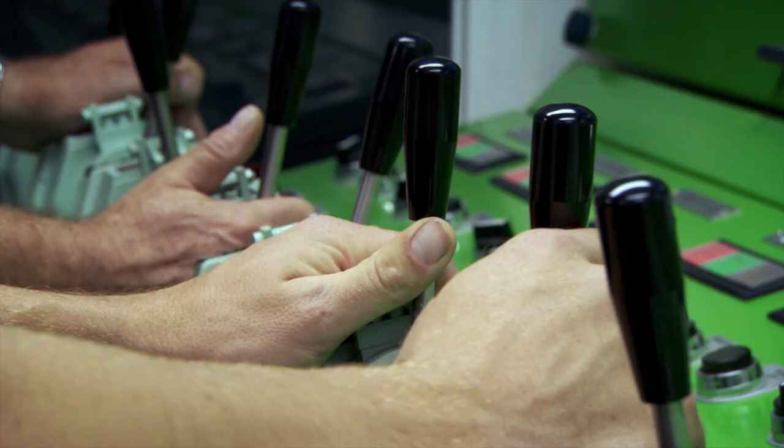These tugs are towing a contradiction. A tunnel segment that's both colossal and fragile. Come back, close. Slow down. A raft of techno breakthroughs and untested results. Bound for a place few know, to entice the world to visit. And even sway the choice for the Olympic Games.

Busan is South Korea's second largest city. 4.2 million people. Bigger than Madrid, closing in on Milan, and as hectic as Manhattan. South Korea is an Asian tiger, and Busan makes it roar. Its skyline will soon include one of the world's tallest buildings. It's the nation's biggest port, and the 5th busiest in the world.

Every 3 seconds, they unload a container. It's so busy, they had to build the sprawling Busan New Port. And still, Busan grows. Busan is such a comer, it's bidding for the 2020 Summer Olympics. But Busan has one big problem, and it's on display here at one of Asia's biggest fish markets. Dozens of vendors cram in here, 14 hours a day, every day of the year. And that's the trouble with Busan. It's so crowded, it's running out of room.

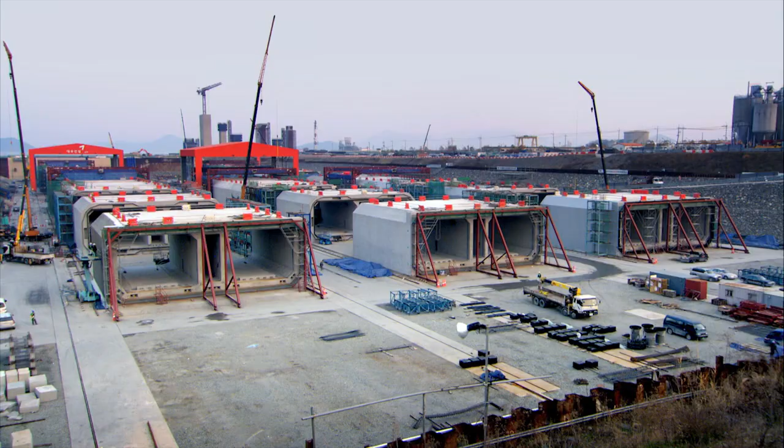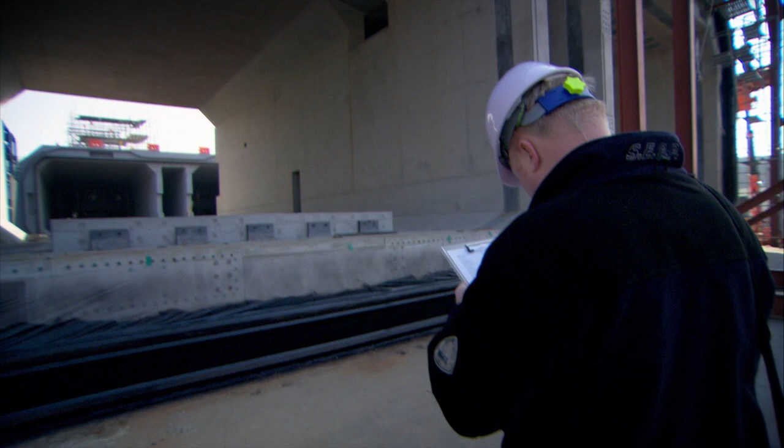Plunging 48 meters below sea level, the link will boast the deepest immersed roadway in the world. The tunnel will be composed of 18 mammoth segments, each as long as 2 football pitches and as heavy as an aircraft carrier. Wide enough to carry 2 lanes of traffic each way, with an access tunnel between. That's the concrete reality. Now, here's where it gets dicey. Each segment has to be carefully towed into position, then carefully sunk to the seabed. And all the segments have to align within 35 millimeters, less than a thumb's width.

Weather adds its own demands. This site is exposed to the open sea. There are always high waves, and the water is deep as well. It is wide open to the Northwest Pacific Ocean, so we have extreme exposure conditions for the construction period. So we've got to be ready for whatever that sends us, like big swell waves, strong winds, and even the occasional typhoon.

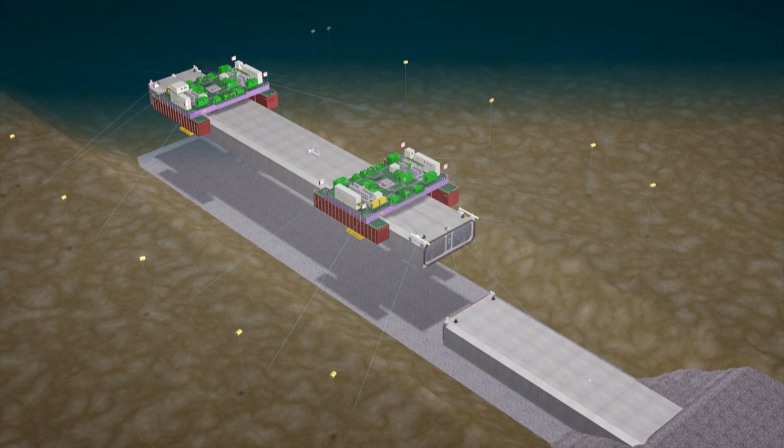Building a tunnel like none ever seen will take techniques like none ever tried. Yet the Koreans have never built an immersed tunnel. But this country has. The Dutch have 5 centuries of experience at holding back the sea. Tunnel immersion is actually a Dutch speciality. If you look at the number of immersed tunnels in the world, most of them are in the Netherlands.

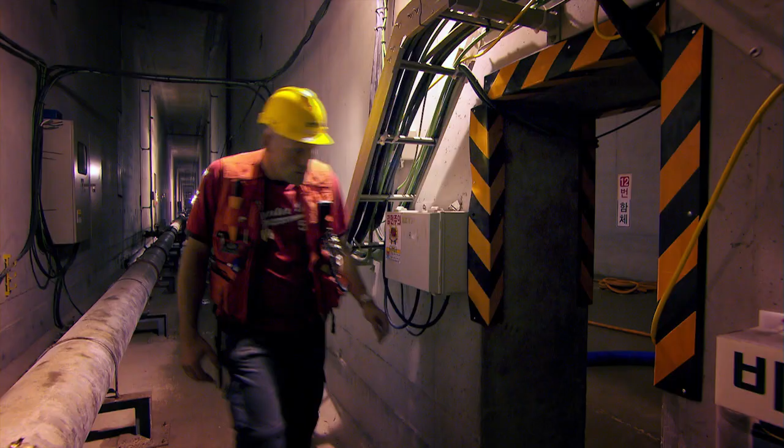21 years ago, Peter van Westendorp joined Strukton at the bottom and worked his way up. He's worked on 8 underwater tunnels. Better when it's tight. Yeah. But none as daunting as the fixed link.

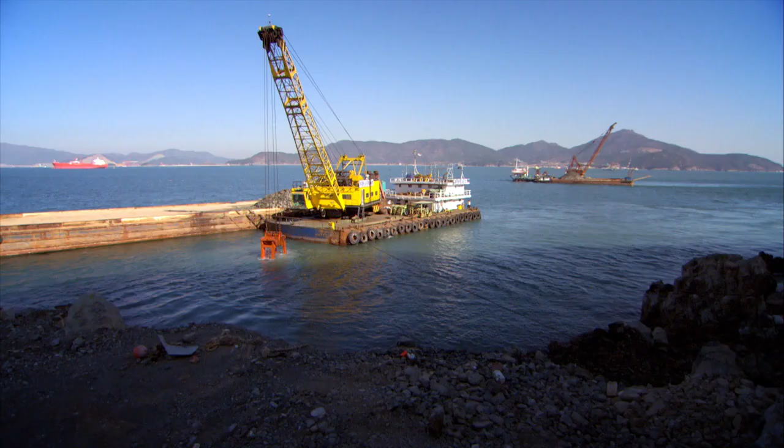First, engineers dredge a trench where the tunnel will rest. To buttress the foundation, they bore concrete columns into the seabed, stopping 3 meters shy of bedrock. The reason? Earthquakes. Avoiding bedrock will give the tunnel crucial flexibility.

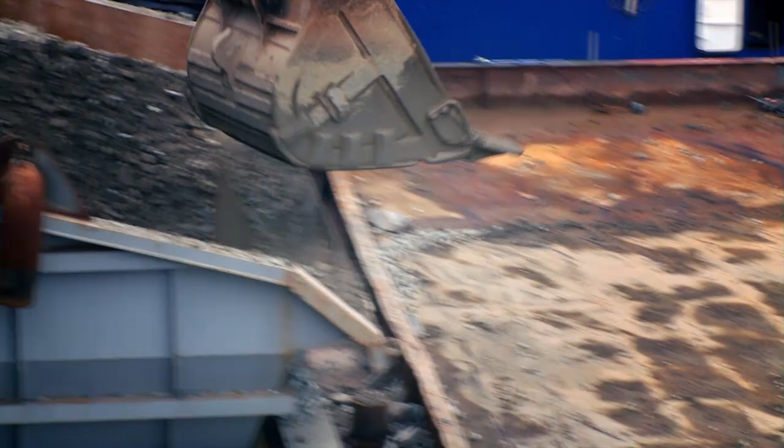The segments will rest on a bed of gravel to ensure an even surface. Because the bed determines the exact height of each tunnel segment, the gravel must be placed with pinpoint accuracy. Later, the entire tunnel will be covered with thousands of tons of crushed rocks to protect it from collisions with ships or anchors.

Because the tunnel segments will be prefabricated, the first challenge is finding land for a construction yard. Not an easy task in Busan. If you look around, there's not a single metre of flat land anywhere that a contractor can use as a base for the construction period. From the tunnel site, the closest spot lies 35 kilometers away.

It's big enough to build up to 5 tunnel segments at a time. Each segment weighs about 48,000 tons and is made of 8 subsections, each twice as long as a London bus.

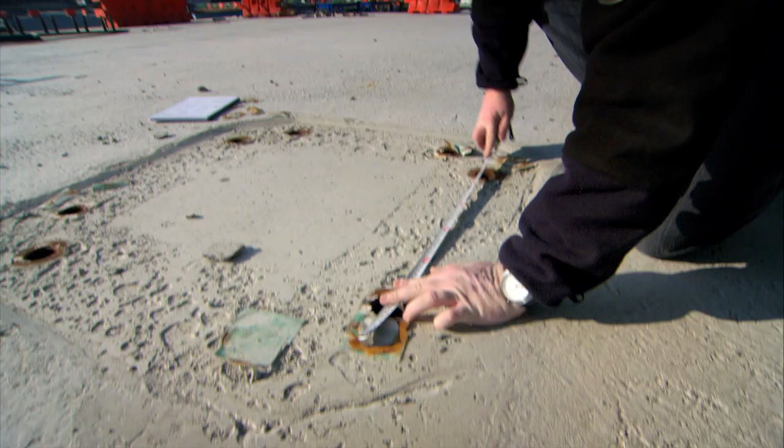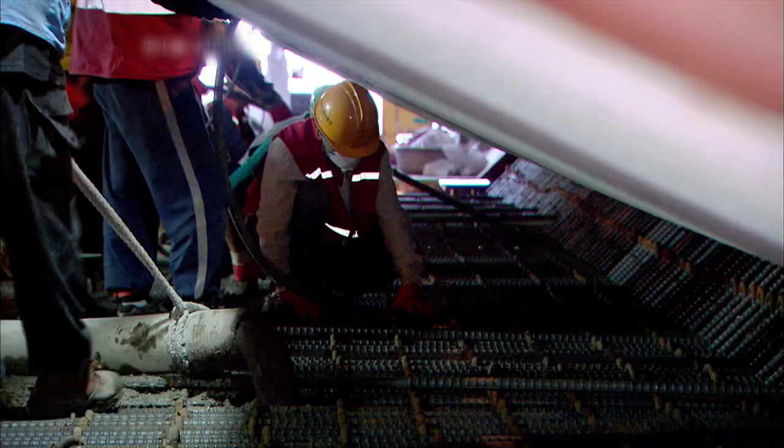Anyone with a basement knows water can penetrate concrete joints, potentially disastrous in an underwater tunnel. But each giant section is cast without a single joint, thanks to Korean ingenuity. We continuously poured full sections from the ground up to the top of the walls to eliminate gaps in the walls. A process lasting 24 hours.

After casting, the ends are sealed with steel bulkheads, a Dutch innovation best appreciated later on the bottom of Jinhae Bay. The bulkheads are watertight because these babies are about to take a bath. Flooding the dry dock will allow them to float the segments out to sea.

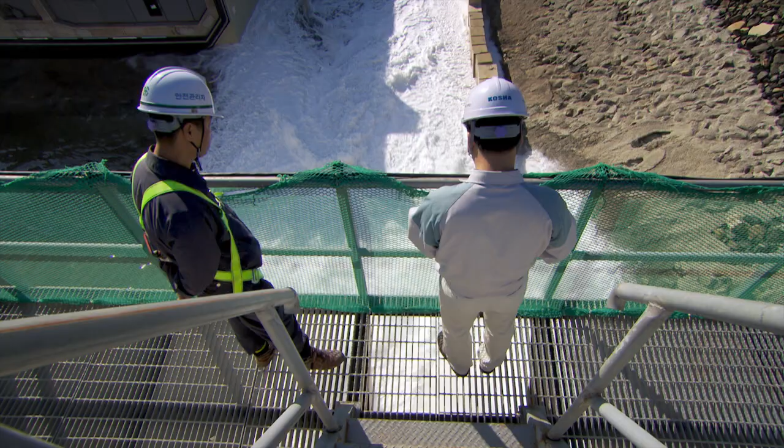The inundation of the dock takes approximately 48 hours. During the first phase, we let in water until it reaches the level of the bulkhead door. Then we'll check to see if the bulkheads are leaking. Once all the leaks are repaired, or if there are no leaks, we'll fill up the dock completely. It's enough water to fill 230 Olympic pools.

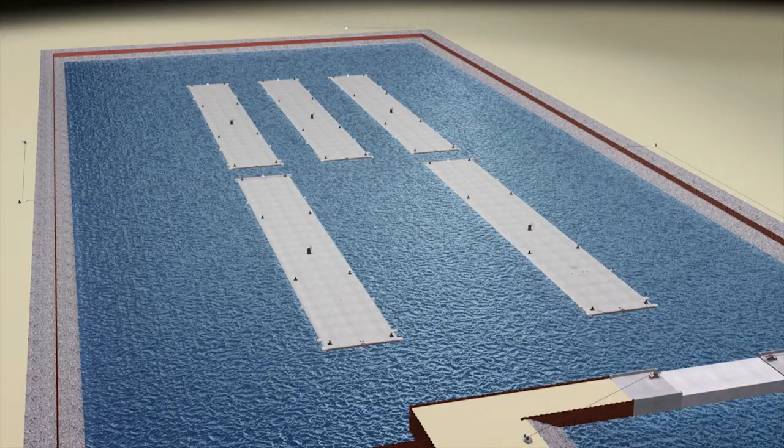After inundating the dock, we proceed with the removal of the dock door. Once it's removed, we're ready to float the first tunnel segment. So how do you prep 48,000 tons of dead weight to float? Inside every tunnel segment, there are 6 ballast tanks, and they're filled with water.

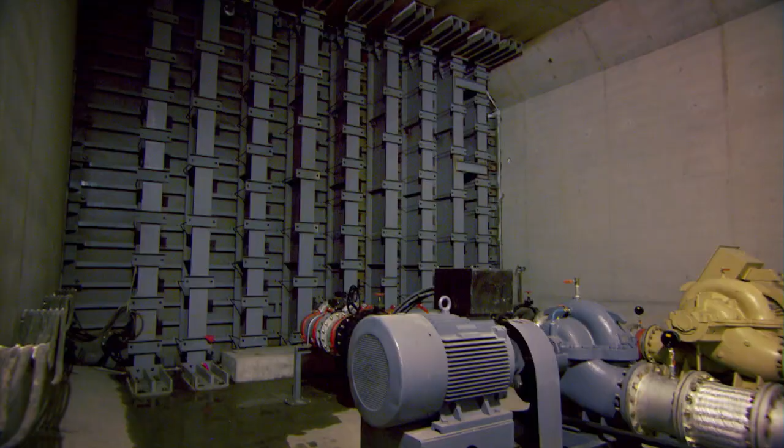To start the flotation process, we begin pumping out the water. We continue until the tunnel segment starts floating. First, a rite of passage for a new member of the team.

What the tugboat has to do is to tow that slow. Then with the other winches at the backside, we control the tunnel element sideways direction. Now they can begin to warp out the segment. Removing the first segment takes brawn and finesse to avoid colliding with the dry dock.

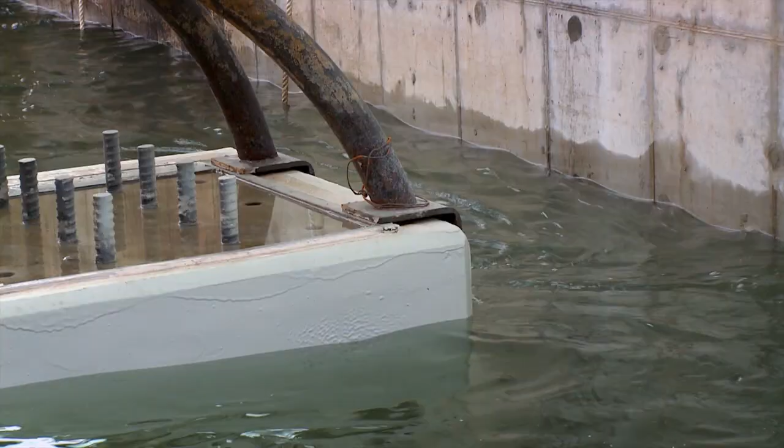With barely 2 meters on each side, there's no room for error.

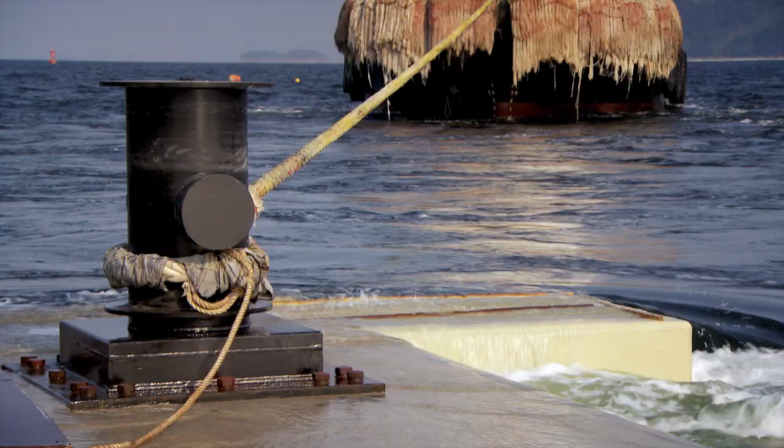Believe it or not, clearing the dry dock was the easy part. While work continues on the undersea tunnel, the rest of the Busan-Geoje fixed link starts to rise. 2 giant bridges. One with 3 pylons, the other with 2.

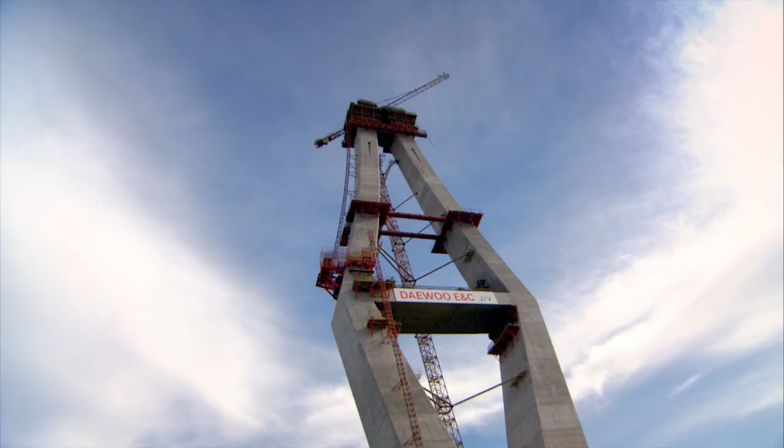At its topmost, the two-pylon bridge will soar 156 meters above sea level, the height of a 50-story building. The span between the pylons will stretch the length of 5 football pitches, with enough room for the tallest freighters to pass under. Crucial for a city that thrives on shipping for its livelihood.

The most pleasing aspect of the bridge is also the most daunting. Its curved diamond shape. Of course, curved pylons are very difficult to construct, but they're very much in harmony with the surrounding scenery in many ways, in that they bear resemblance to a mother's praying hands and to the wings of seagulls.

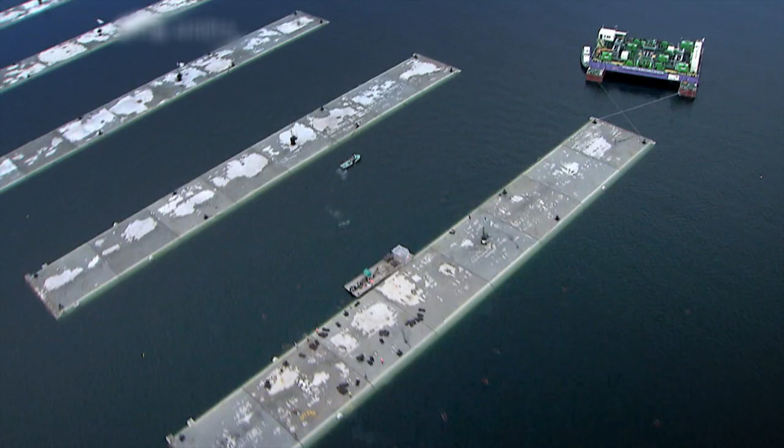35 kilometers away, the first 5 tunnel segments arrive at a temporary mooring site. From here, they'll travel across Jinhae Bay to their resting place on the sea floor, already leveled and lined with gravel. And here's how they'll get there.

Pontoons the size of a mansion. Dutch designed, Korean made. One pontoon is positioned near each end of the tunnel segment. After arrival at the tunnel site, mammoth winches on pontoons will lower the segment to the seabed. At least, that's the theory, because it's never been done in the open sea. A specialist diving team prepares the first tunnel segment for the immersion operation.

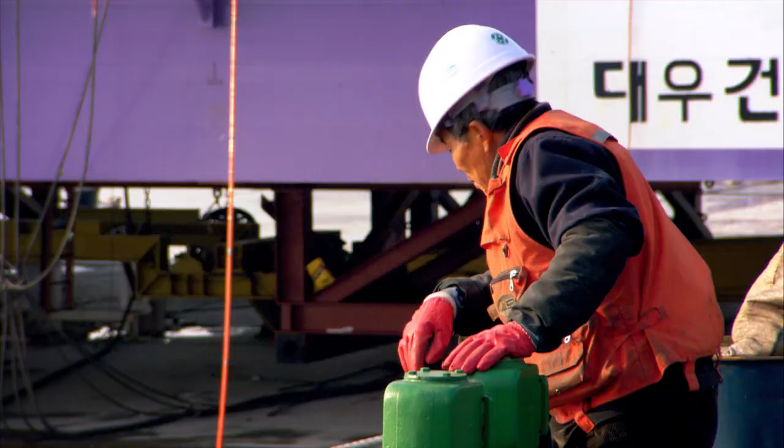Divers test connections for data systems and power supplies, standing by, and remove marine growth from the bulkhead. Down on the wire, please, Steve.

Down on the wire. Finally, they install steel wires underneath the tunnel segment, crucial for positioning during immersion. In a good position now, we can come up on the wire. Coming up on the wire.

Above water, the crew are also adding a temporary access tower, so workers can enter the segment in case of trouble with the ballast tanks. Over, the tunnel is clear.

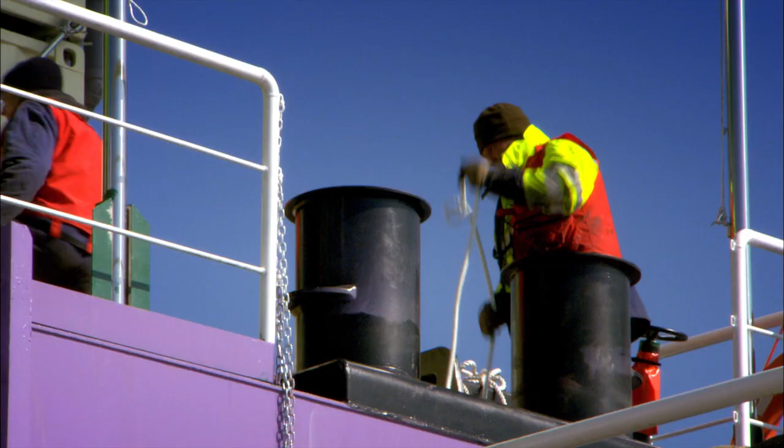Every problem has to be anticipated, because if things go south, they won't get a second chance. What we do doesn't have anything to do with luck. We know what's involved, we know how the process works, and we have the feeling we control the whole process. Not quite.

Back in Holland, the rest of the immersion team stands by to fly out. In all, 56 men wait for Peter to say go, and he's waiting for a forecast.

When the wind blows from the south, swells roll in from the Pacific. Because we're situated offshore, we have to deal with waves. And these waves can be pretty fierce.

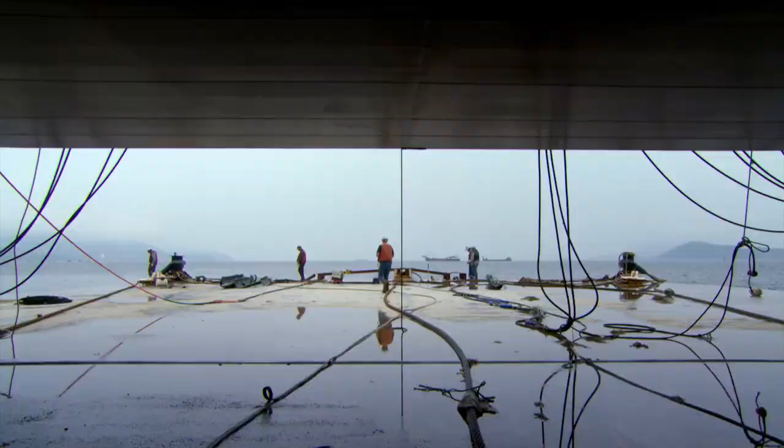Even swells barely 30 centimeters high pack so much force they could fracture the subsections that form the tunnel segment. Throughout its journey, the segment will be at the mercy of the waves, so the team needs 3 days of calm seas.

Strukton looked around for a forecaster, but few dared to stick out their neck for such a costly guess. Then, a Danish company seized the challenge. They came up with a model to predict waves as small as 10 centimeters, up to 5 days out. A stunning breakthrough in forecasting.

That means we're able to say, tomorrow we can do an immersion. And that means we're able to put people on the plane today, really on a last-minute basis. It takes away a big risk for us and for our client.

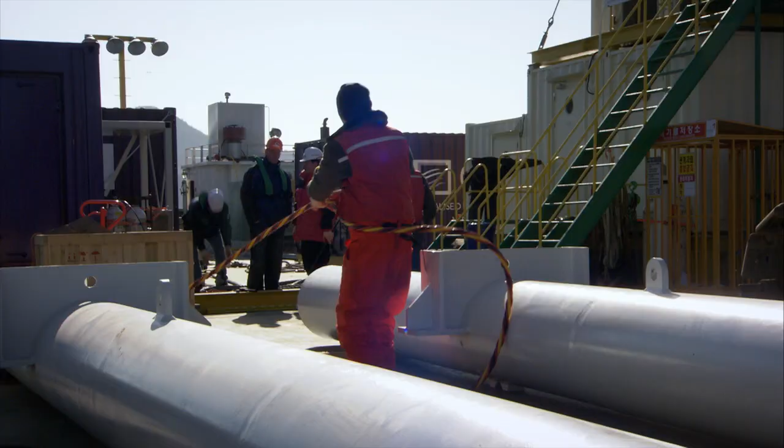We've got the weather. They're all showing the same prediction. The swell still not as bad. I would say we go. Green light. We'll try it. Okay, thank you. Yes, bye-bye.

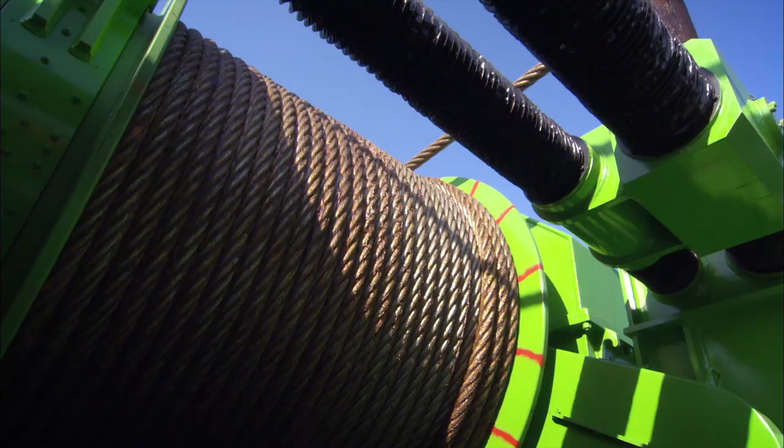Ahead lie 48 hours of tension for the boss. Six months of work, rides on steel threads, and a forecaster's guess. Tonight, no one will sleep soundly.

After a cautious voyage at 3 kilometers an hour, the first tunnel segment arrives at Gadeok Island, the starting point of the tunnel.

Joining Peter is the elite team fresh from Holland, among the few men on the planet who can do this job.

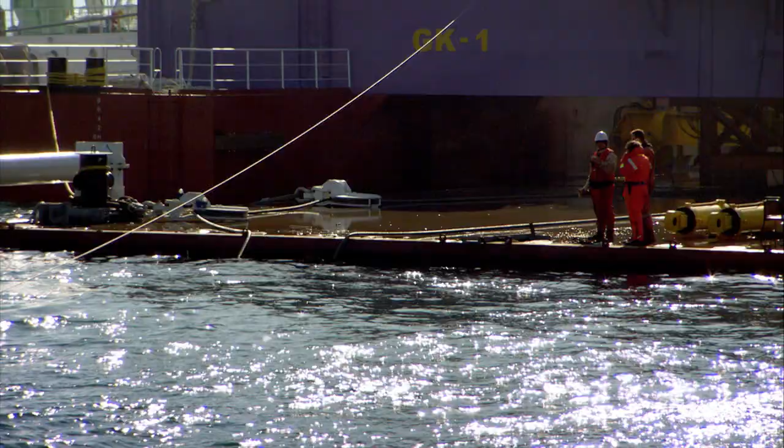But working along shore poses a huge challenge. 48,000 tons have to be maneuvered into a slot with just 1 meter of clearance underwater on each side. One false move and the segment could get jammed in the rocks.

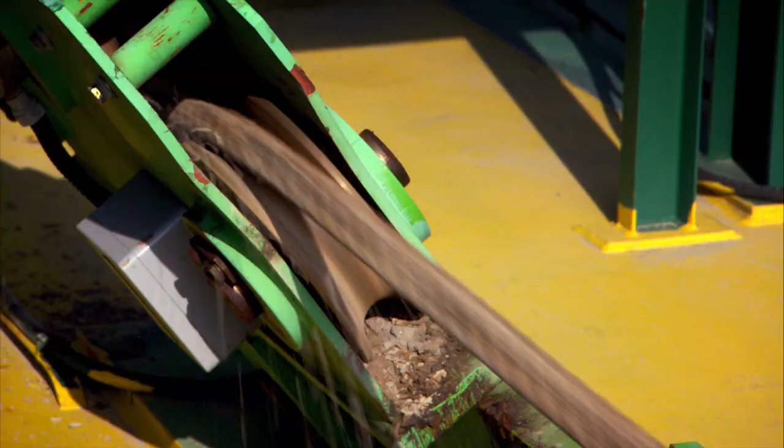Controlling the segment are 14 steel cables, anchored in the rocks and on the seabed. Aligning the segment takes painstaking accuracy. Surveyors take readings using a system of prisms and mirrors mounted on the access shaft and the survey tower. It's all new to the Koreans, so it takes time getting used to the technology.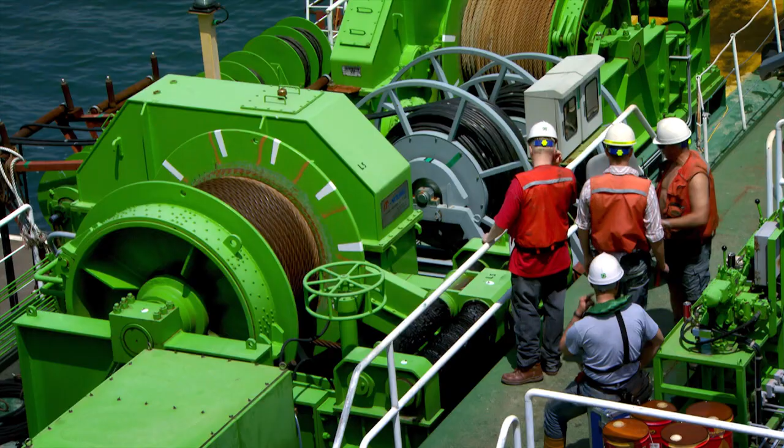The ordeal will take all day and end either with an engineering triumph or a 48,000-ton disaster. With so little clearance and so much at stake, the segment moves at a snail's pace. After a journey of 35 kilometers, it's now just 4 meters from the abutment.

We've worked really hard for a half a year to prepare for this moment. 56 of our people are here to execute this operation. The Koreans are excited and tense because they've never witnessed this. We've done it more often, but still, a very special moment.

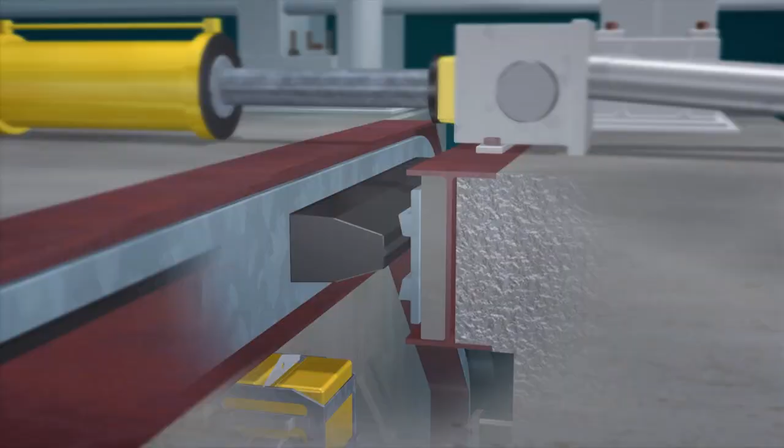Till now, steel plates have protected the leading edge of the segment. Easy down. Behind them is a component as crucial as it is fragile: a rubber gasket to ensure a watertight connection with the abutment.

One more step, symbolic but important. Every segment will be christened with a woman's name. Ji-sung is the daughter of Mr. Che, general manager of the project.

Now they're ready to begin the descent. Operated by remote control, the ballast tanks slowly fill. The command post monitors everything via remote control cameras, on the pontoons and inside the tunnel segment.

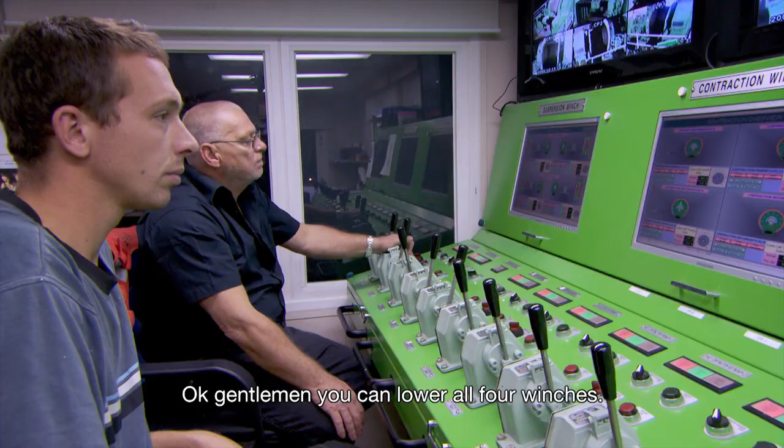The segment must align with the mouth of the tunnel to within 3.5 centimeters. You can imagine that if this segment were placed 10 centimeters off and you did that 18 times, you'd end up 2 meters off on the other side. Well, that wouldn't be very good.

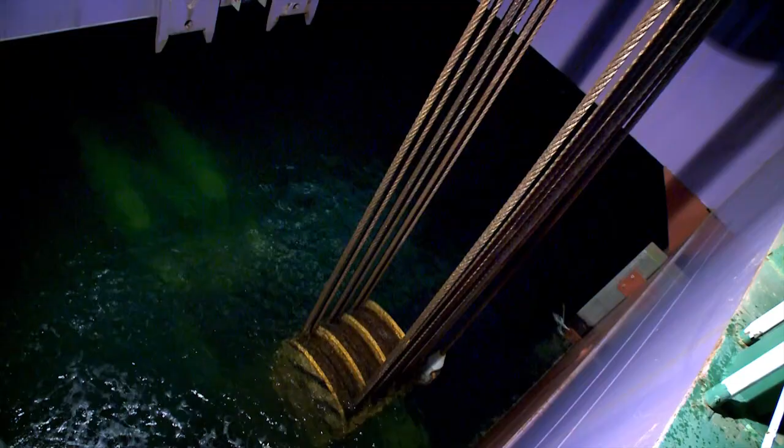7 hours later, touchdown. The segment now rests just 50 centimeters from the abutment, the mouth of the landward tunnel. To close the gap, engineers have installed a pair of powerful hydraulic jacks. Linking the jacks and applying tension closes the gap.

But the engineers hit a problem. The hole for the connecting rod is too small. Forget remote control. Adjusting the jack means neck deep and hands-on. With the wind chill, it feels like -20.

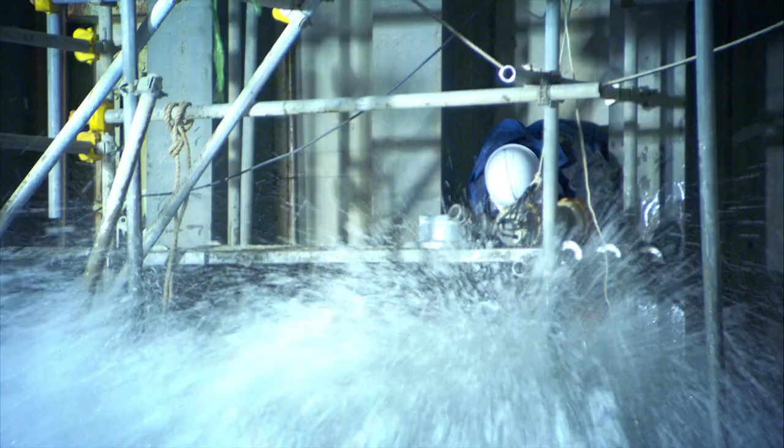The final stage begins from the landward side. A wall of water nearly 3 meters wide separates the segment from the abutment, what they call the immersion joint. Opening this valve will force the water out. As the immersion joint empties, external pressure will further compress the gasket for a watertight seal. The echo from the bulkhead reveals the water level in the joint. With the water drained, they can open the bulkhead door.

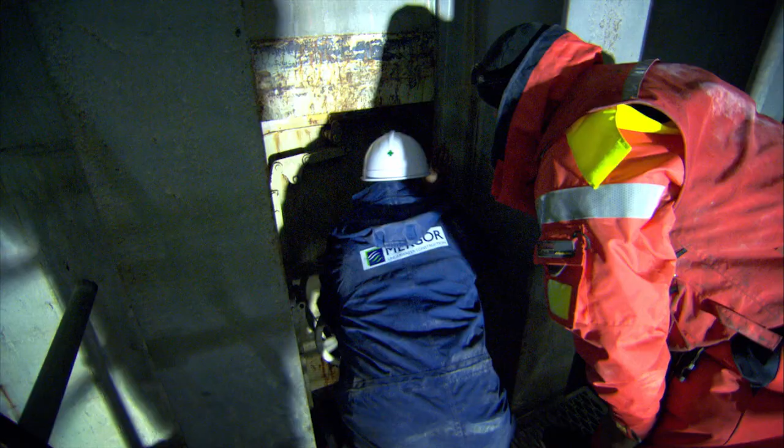But the lock's jammed. You know that he was going to break? Huh? Did you know that? Because you took the toolbox with you.

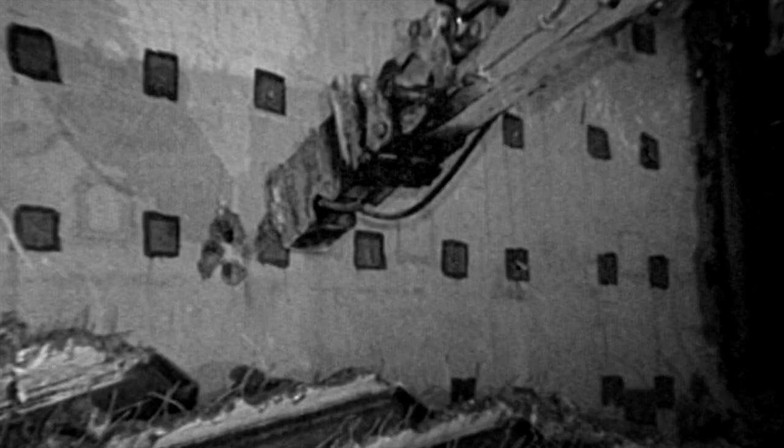This calls for cruder technology. All that stands between the crew and the first immersed segment is the steel wall installed back at the dock. And here is why it's so brilliantly simple. On other tunnels, engineers seal the ends of segments with concrete, then knock it out after immersion. But that takes time and creates debris. The modular steel bulkheads are easy to install, easy to remove, and they'll be reused on every segment and eventually recycled. Faster, cheaper and safer. An engineering trifecta.

Finally, open sesame.

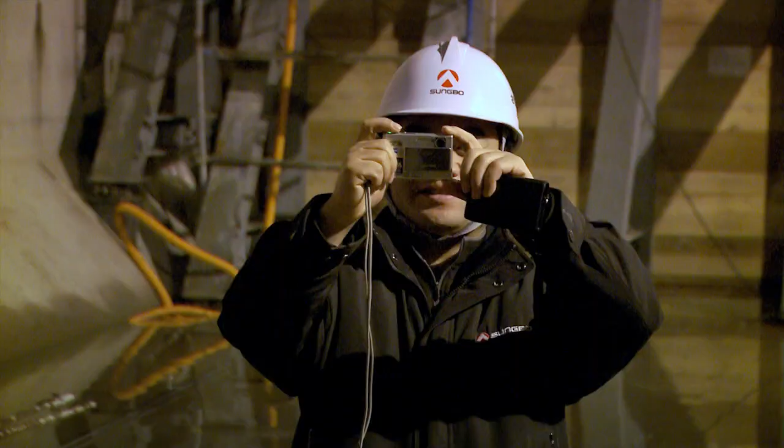Their marathon operation lasted almost 78 hours. Some have gone 2 days without sleep. 1 down, 17 to go. And they won't all go smoothly.

And once summer arrives and typhoon season hits, the weather will be too dicey to predict. No immersions then. 4 months robbed from the schedule, with no time to spare.

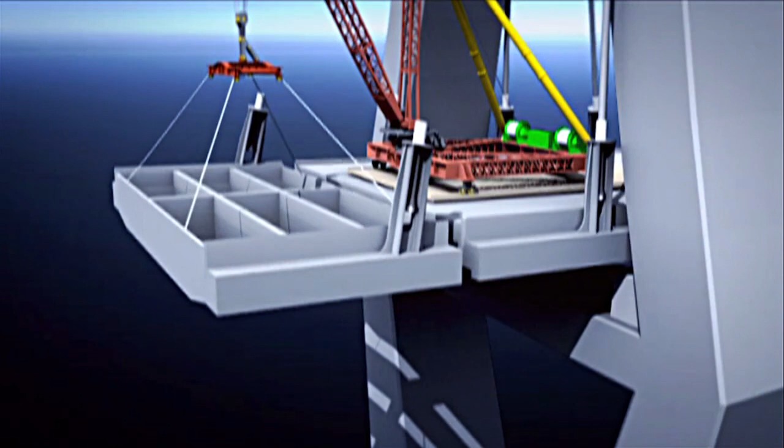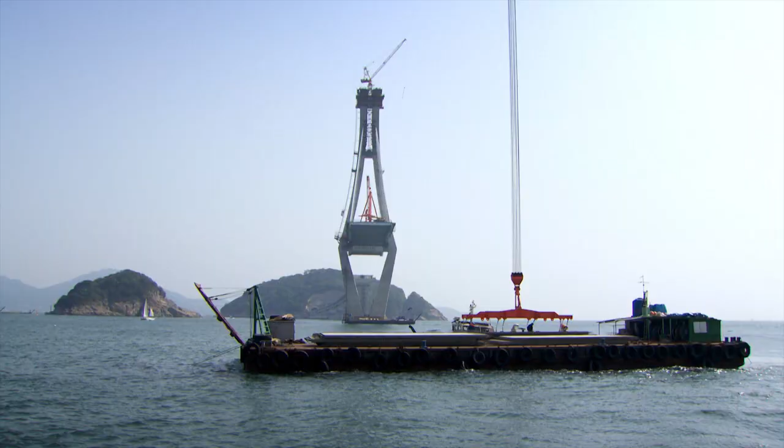Like the Busan Tunnel, the bridges advance in segments, but 2 at a time, not 1. It's called balanced cantilever construction. Working outward, steel segments are laid on each side of the pylon to keep the bridge in balance. Then 2 cables are attached to brace the segments. Once they've done that, the derrick crane then lifts up 6 precast concrete panels and places them onto the steel frame. Then put a final post-tensioning into the cables. And we're ready then to start the whole thing over again.

Back at the tunnel, the team have installed 12 concrete segments. But now they're heading for 48 meters, the deepest water and the hardest challenge.

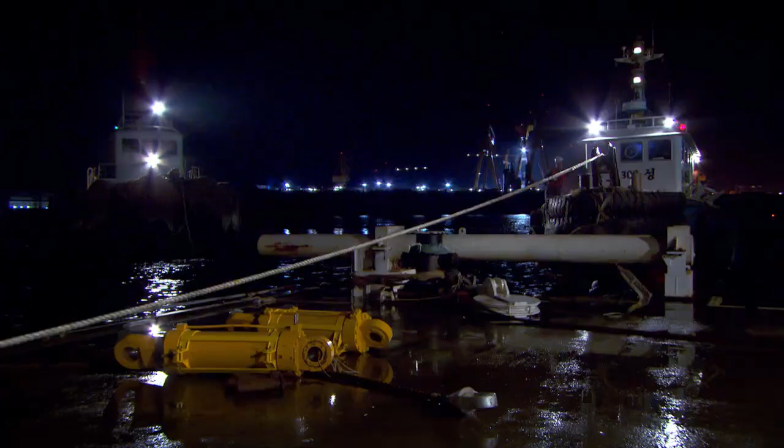New hurdles demand new techniques.

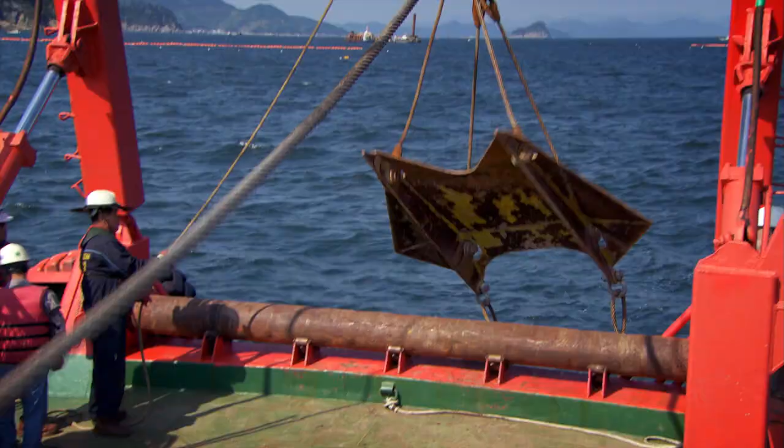The sea floor out here is soft clay, so they need to set anchors that can hold the segment and pontoons fast. Stevmantas, named for their fish-like shape, are designed to dig in where other anchors lose their grip.

Like the entire Fixed Link project, this stage takes precision. GPS coordinates to drop the anchors and a sixth sense to set them. The current moves us towards it. We're still 20 meters from target. Target, let go anchor.

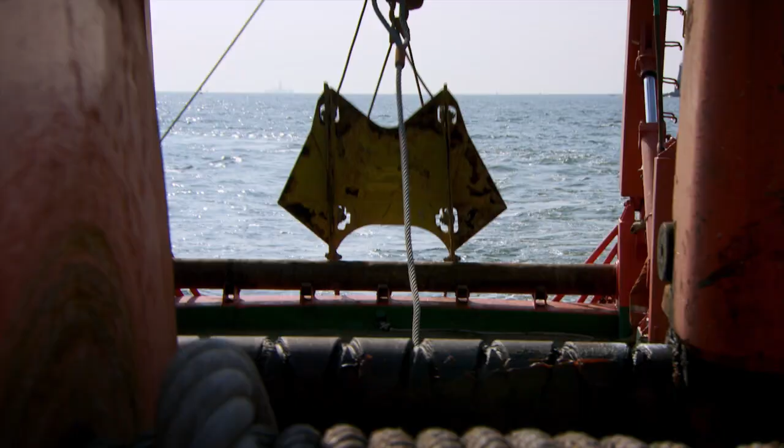If all goes well, you'll see slack in the wire, and then the anchors at the bottom. That's now. Two engines full ahead. So now we're going to dig the anchor in the soil with full power.

Once segment 13 arrives here, 14 steel cables connected to the anchors will hold it in position. Power packs drive the gigantic winches that will lower and position the segment.

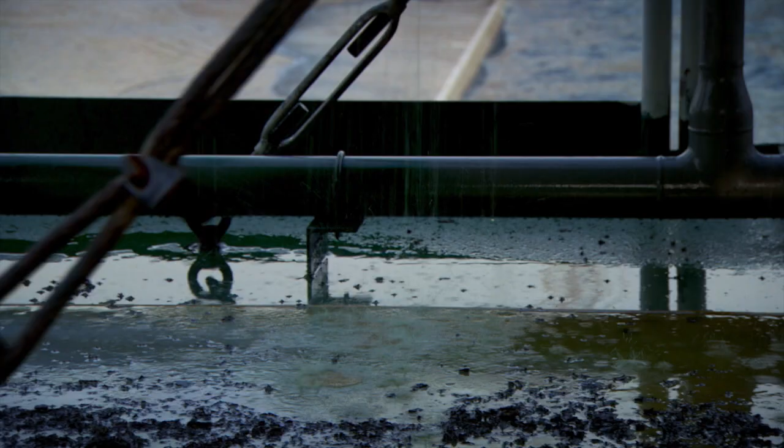That is the sound of trouble. When we started up the power pack, it revved too high from excessive turbo pressure, and after a few minutes, we discovered it was leaking oil, so we switched it off. These power packs are the beating heart of the winches. Without the packs, you can't operate them. We're replacing the seal and changing the oil. I hope we can proceed soon.

Fixed. Now it's back to work.

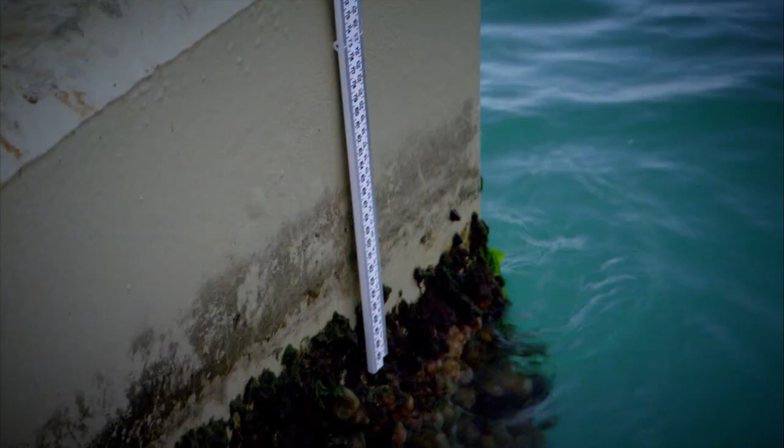The final step before immersion, measuring the freeboard, the height of the segment above the waterline. That way they know how much water to use to flood the ballast tanks. Too little and it won't sink. Too much and the system gets overloaded. Gauging the freeboard is one of the most important parts of the immersion because it tells you how high the tunnel is above sea level and the amount of pressure the water is exerting on the tunnel segment.

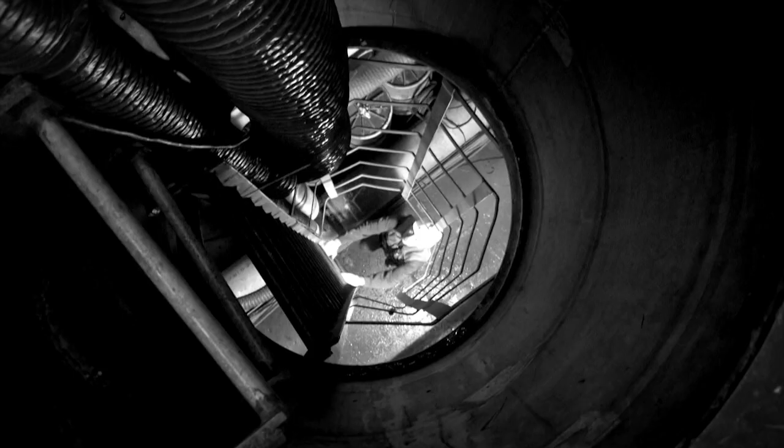But once again, deep water raises the stakes. Once the segment hits the bottom, suppose a problem arises with the ballast tanks. Somehow, Peter would need to get the engineers inside. On segment 1, they could use an access tower, but not in deep water.

The solution is a first in tunnel immersion, a self-propelled diving bell. Purchased in America, the sub was refitted just for this project. I'm coming down to 15 meters, see if we can get the tunnel on sonar. This is the tunnel element here. That's something probably a bollard on the corner.

With a little boat like this that can go to 300 meters, you've got the concept of a ferry transferring people to the tunnel segment. It's 9 meters long, with room for a pilot, co-pilot and 5 engineers. It can dock on a landing tower on the segment for watertight access to the tunnel.

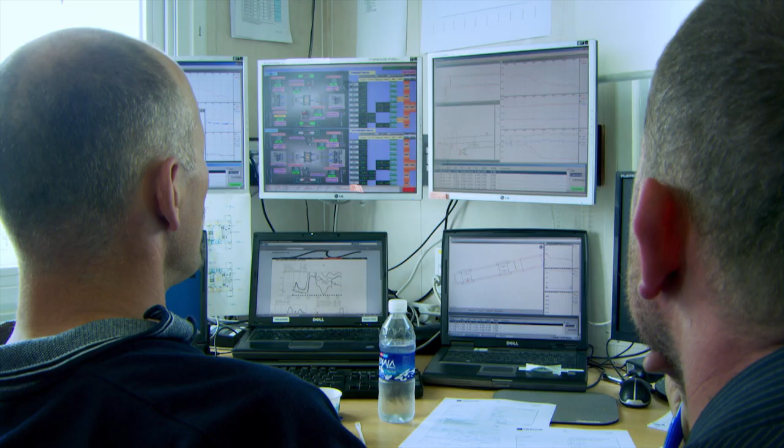Deep water poses another problem: monitoring the position of the segment as it's lowered, because one misalignment would be disastrous. To calibrate the position of the first segment, surveyors took readings from prisms mounted on the access tower.

But remember, there's no access tower here. So once more, the Dutch devise a smart, simple solution. It's named for what it is.

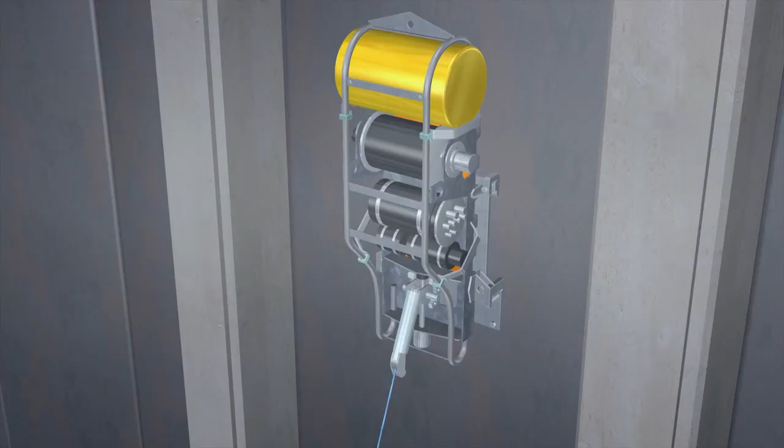A taut wire. One end attaches to the leading edge of the segment to be immersed. The other end attaches to the previous segment. The taut wire ensures the connection stays under high tension.

Positioning the device is a delicate operation. This custom-made model is the only one in existence. Breaking it is not an option. When this segment descends, a computer will record the length and angle of the wire, allowing the team to monitor the segment's position.

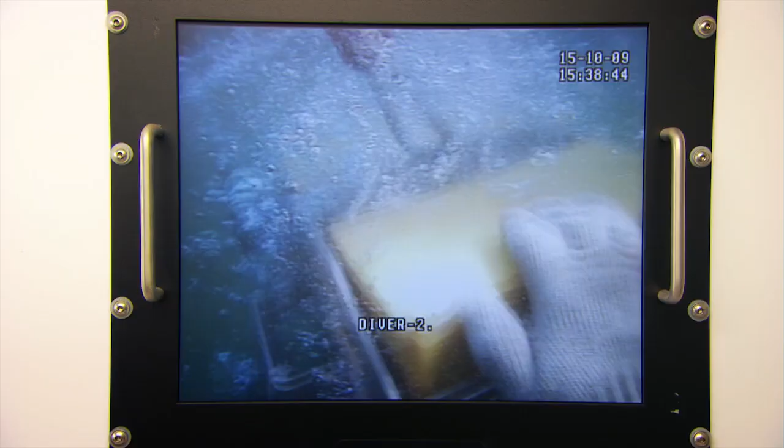To fine-tune the position of the segment on the seabed, 4 of these sensors are attached, one on each corner of the bulkhead. Another custom innovation for this project. And wait till you see how accurate they are.

The whole operation is remote controlled from the command unit on the pontoon. The tension, the excitement builds during the day, or actually during preparations, like, did we cover everything? With one click, they start filling the ballast tanks.

You can feel the tension building up now. And then we all have one question: can we do it again? Can we get it in position?

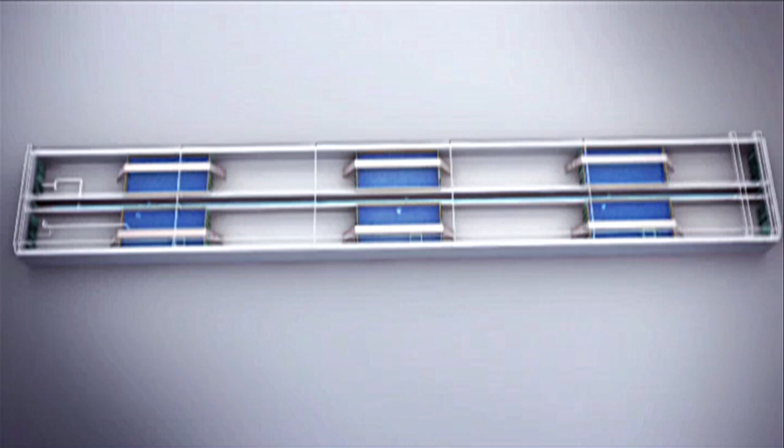It's the same tunnel, but it's farther away from the coast. It's deeper, the weather, everything. So many aspects make it different every time, so you have to stay alert.

All the data feeds into Peter's computer and refreshes the position of the segment every second. This is the tunnel where we have to go to. The green one is the final position, and this is where it is now. So you can see it's just below sea level.

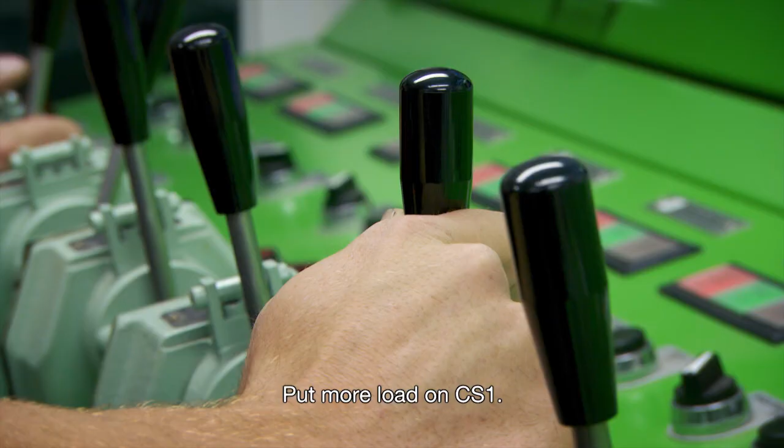Data from the winches allows him to adjust the segment during descent. It all happens like walking downstairs. One step forward, one step down. And the deeper it goes, the more careful the steps.

At this stage, where the tunnel is just a few meters underwater, there's no problem. We can still move in any direction. Nothing can hit it. But when we're approaching the segment that's already on the bottom, then I have very little clearance, so the steps I make will be a lot smaller.

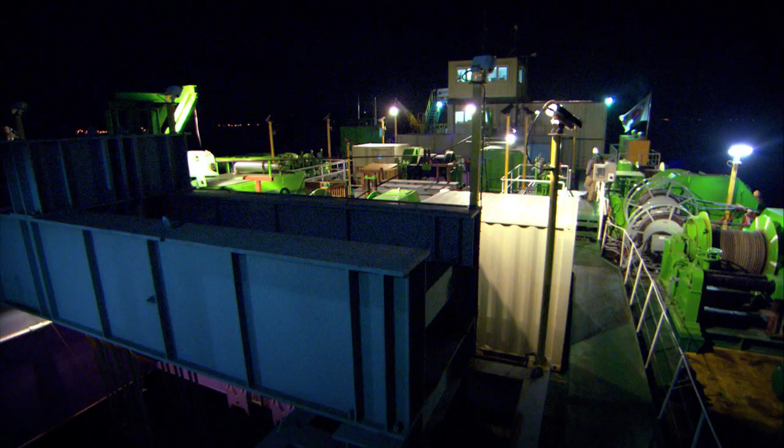The first step in joining the segments poses another challenge and another solution. The challenge was finding a mechanism to link one segment with the other. The moment a tunnel segment approaches the one ahead of it, it's moving because of the swell. So we installed 2 guide beams on the top end of the segment.

Another simple but elegant solution. The moment we pull them closer together, the guide beams become less flexible. The movement diminishes until the segment is motionless.

With only 50 centimeters separating the segments, and in near zero visibility, a diver connects the hydraulic jacks. The segments seem aligned, yet the slightest error on this end will translate into a big mistake at the other.

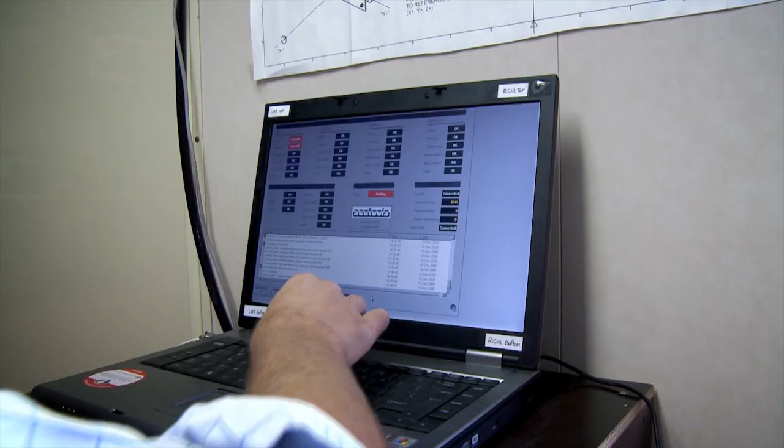The 4 remote-controlled sensors on the bulkhead now deploy. They measure the position of the segment within 1 millimeter, the width of a guitar string, and relay the data back to the command center.

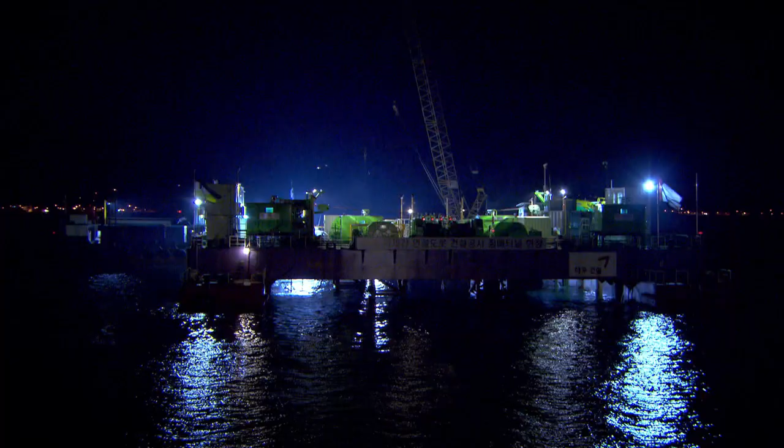Peter needs to shift 48,000 tons of concrete, 20 centimeters to the right. Even on calm days, the swell is so heavy and the segment is so long, stability is a problem.

The solution? The External Positioning System, or EPS. Yet another Dutch invention based on a simple idea. A pair of hydraulic legs and extendable feet to hold, lift and move the segment.

Connecting each pair of legs are 4 steel cables, already installed back at the mooring site. Braced on its robot legs, the EPS laterally aligns the segment into its correct position. Now, the jacks are tightened by remote control, compressing the rubber gasket.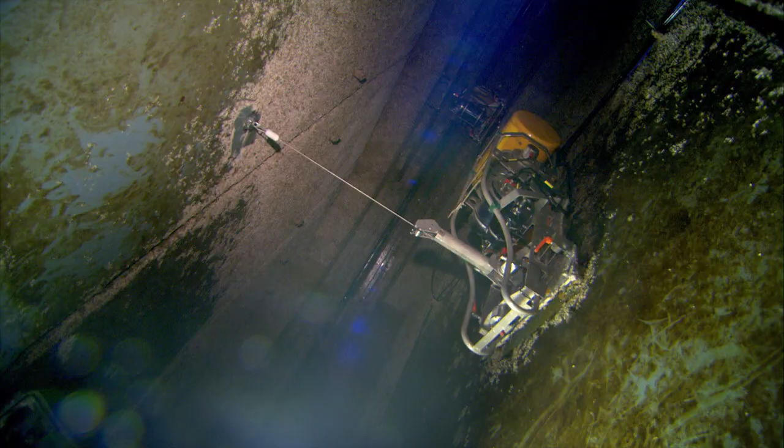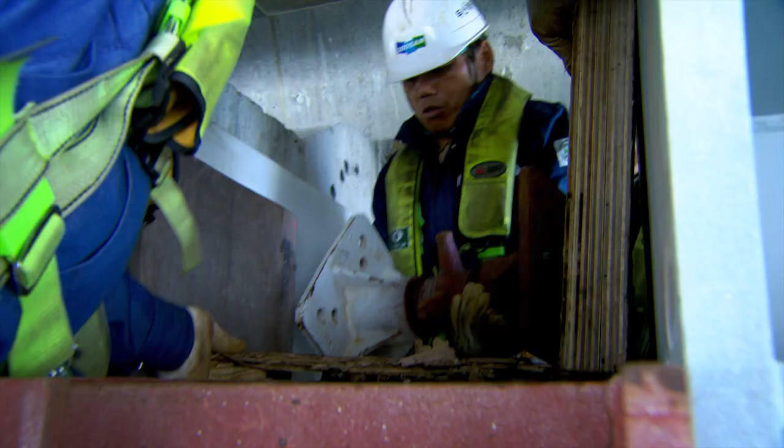Done. One more segment complete. Like the tunnel, the bridges approach the final stages. Before the 2-pylon bridge can accept its last section, engineers have to perform a stretching exercise, as tiny as it is powerful. Both pylons have to be pulled back about 7 centimeters to create enough space for the key section to be placed. Once the tension is released, the final section will have a tight fit.

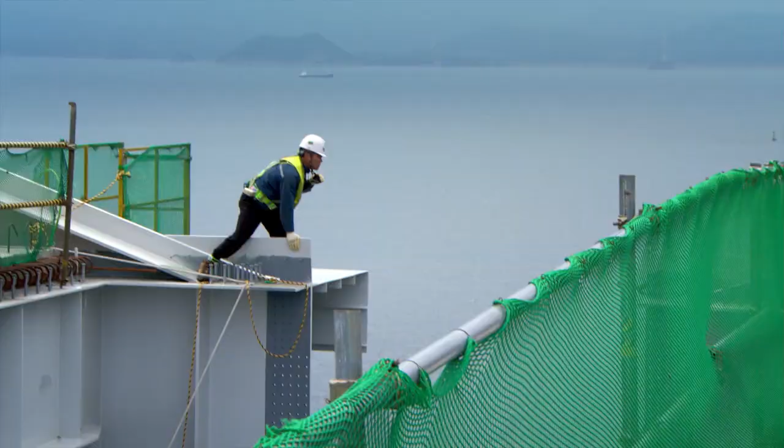After 6 years, they must be eager to finish. But just like the tunnel crew, they have to move in baby steps. Because this baby is a giant. A few kilometers away, Peter's crew prepares to install their last segment. Just like the first segment, number 18 has to be maneuvered between rocks. As before, they run some of the anchor lines from the pontoons to the rocks.

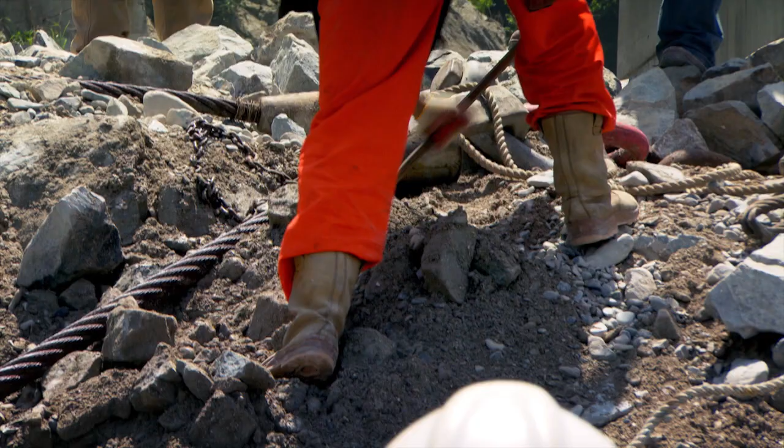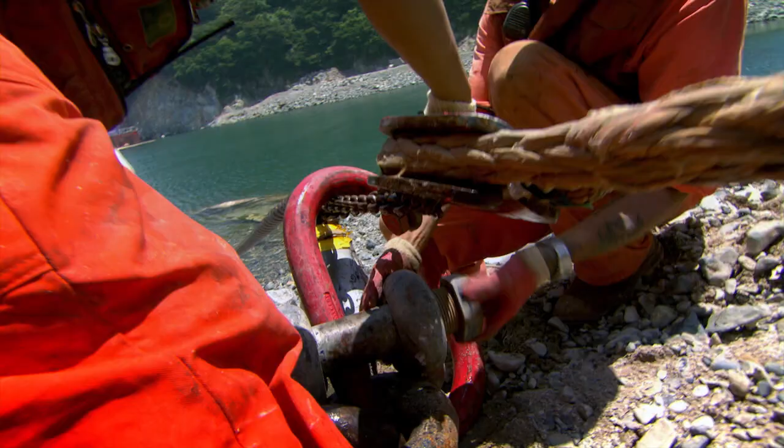Because it's so close to the island, it's very difficult to install the immersion wires. Connecting them isn't easy by any means. It's not just a matter of simply pulling them in place. We're trying to get the socket of this wire to the anchor point and connect it with a shackle. With all cables attached, they can start maneuvering the segment into place.

Because this segment is extremely heavy, we can't afford even a small mistake. Light contact can cause huge damage to the segment, and that kind of damage can set back the entire project. After 3 years, they'll open the last tunnel segment tonight, if all goes well. The segment hits the bottom, but there's trouble. One end is sitting 28 centimeters too high.

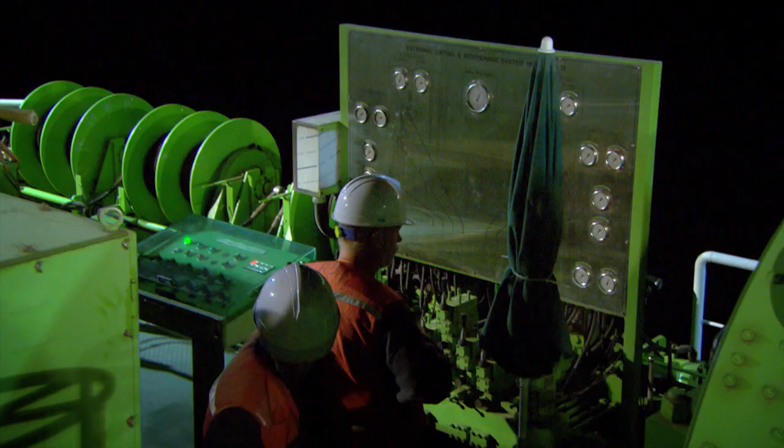We're now trying to figure out what the cause is. We don't know yet. It's a major problem at the moment. We're taking about half an hour to go through all the steps so that we don't miss anything here. And then I'll inform you about the situation. The gravel foundation under one of the EPS feet is overbuilt, so they'll have to remove the foot, and the grand opening will have to wait one more day.

After final adjustments, the last tunnel segment now sits squarely on the sea floor. All that's left is entering the tunnel to seal the joint with the final segment. They'll enter via the tunnel entrance on Gadeok Island. It's the last time Peter will make this trip.

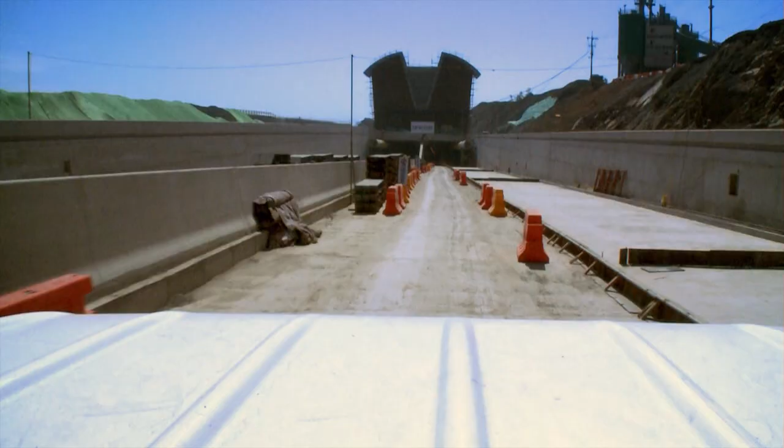You start something 3 years ago, and the first time you think, gee, still so many to go. But time flies, and now it's the last one. That feels kind of strange, mixed feelings. Glad it's almost finished, but it's a pity we can't do one more. We're approaching that moment again. It's at the bottom, opening the door, hoping it'll all be okay. After 3 years, light at the end of the tunnel.

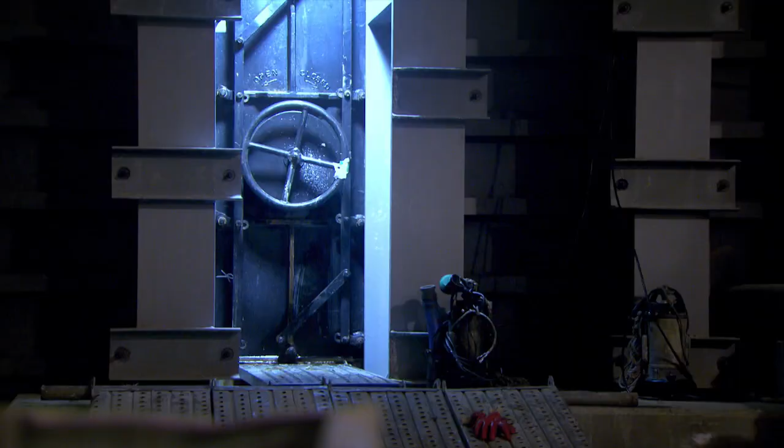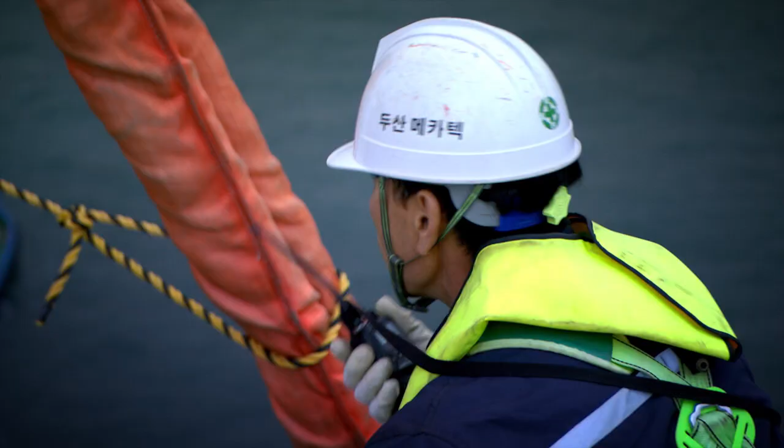They always celebrate this step, but today is the grand finale. Once complete strangers, now firm friends, and soon to go their own way. The end of their long journey lies behind this bulkhead door, and the honor of opening it falls to Peter. Back at the bridge, the final section is lifted into place. Once the tension on the towers is released, the whole structure will be locked in place. With the bridge complete, all that remains is opening the final segment of the tunnel.

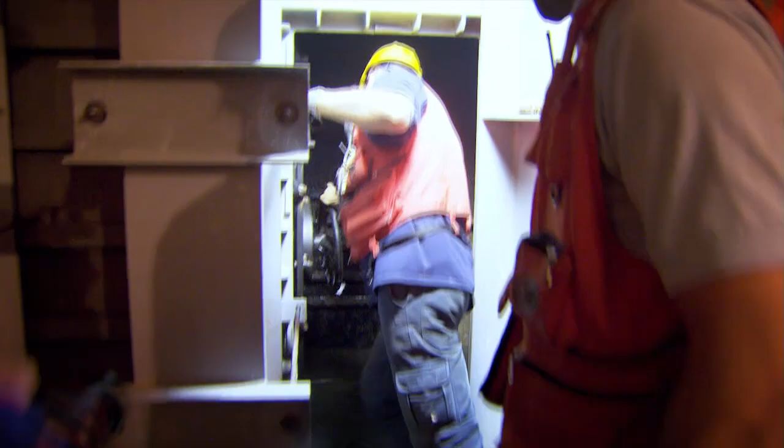Last inspection. Really extremely proud that we did it, and happy, of course. Happy for the whole team. It's just great. After all this time and after a difficult operation, we did it. Very emotional, yes. Fits the moment. And proud. So proud. Yeah. Come back.

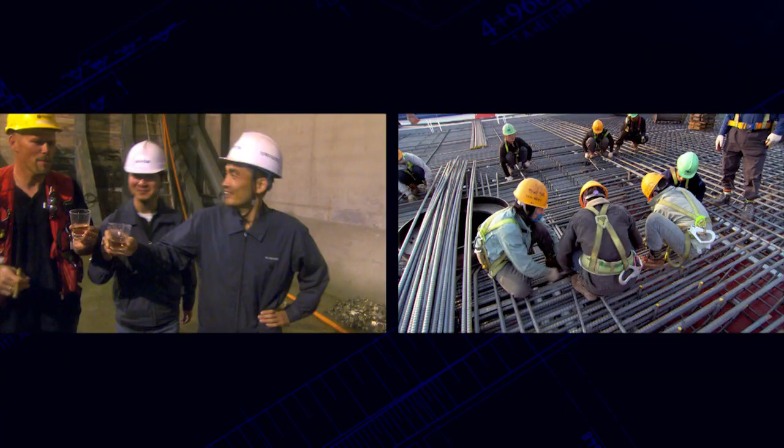For Peter's team, the tunnel marks another success on a stellar resume. For the Koreans, it's a chance to join the Dutch on the world stage. Actually, this was the first immersed tunnel project in Korea. And we developed lots of new equipment and we trained lots of engineers, and eventually we could finish in time and everything is happy. This isn't just a shortcut to an island. It's a path to the future. And who knows where that leads.